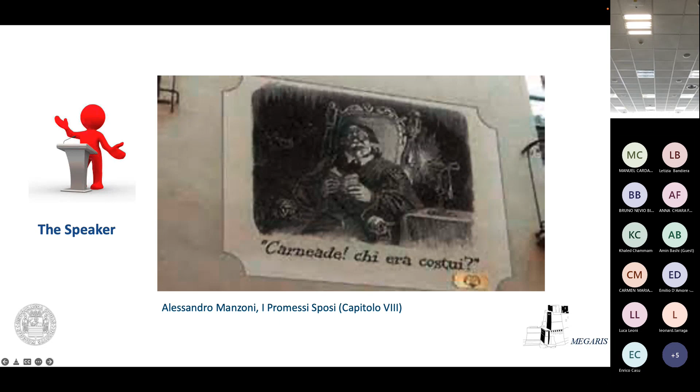I will be very fast. I'm a chemical engineer and have been involved in academic engagements over time. The reason was to notice that to be a professional engineer, you must be involved in your career both in the professional world and in the academic and scientific world. This isn't just a personal approach - the world is demanding this from young people, different from when I was a child.

This is essentially my department in Brussels, Belgium. I'm involved in the part of the physical chemistry department dealing with process safety, which is becoming a more and more important part of chemical engineering.

With the Mary Kay O'Connor Process Safety Center at Texas A&M, I had the pleasure to work with Sam Mannan. Sam Mannan passed away a couple of years ago, but was probably a pioneer - this is a very important department, maybe now the most important for process safety. We have 100 people working just on process safety, and I had the pleasure to interact with them on reactive hazard assessment.

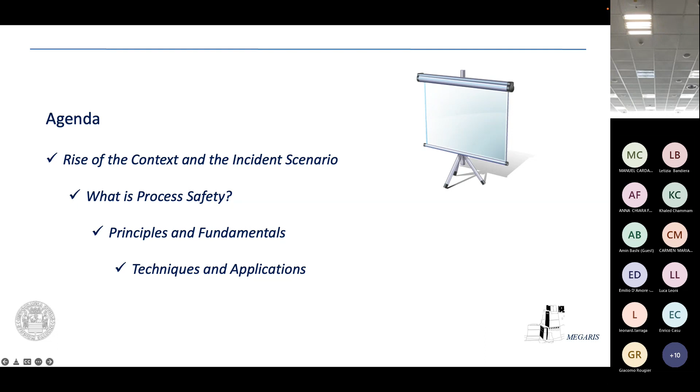Some principles and fundamentals - you are now in university, and we are very lucky, because you are following very important courses, and I know Professor Sesti is implementing a kind of mixed information between academic and also a look to the industry. So principles and fundamentals, some practical applications that we'll try to show and demonstrate to you, hopefully in the next minutes - rise of the context and incident scenario.

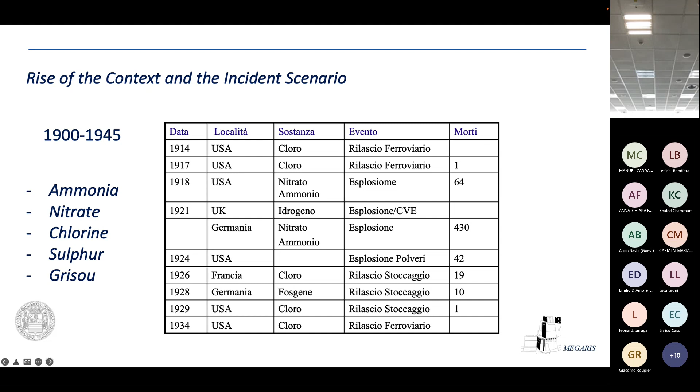5 incidents - I will try to be very fast. What is the context? We know that until the Second World War, industrial chemistry consisted essentially of inorganic chemistry: ammonia, nitrate, chlorine, sulfur, grisou. You remember maybe a relationship between these substances and incidents. There is no appreciable organic compound, just inorganic. We can see the relationship between geography, substances, event, and the final fatalities, lethality, and danger in general.

In the 1950s to 1970s, after the Second World War, the nuclear industry developed novel concepts. There was a scientific pushing effect regarding the necessity to find an inherently safe reactor - the reactor must be inherently safe. We will try to understand what we mean by this, but process reliability, risk assessment, and inherently safe reactor concepts come from the nuclear industry, essentially from its early stage in the 50s and 60s.

After that, due to the discovery of the potential of the carbon atom, oil and gas and petrochemical industry changed our life - when you were born, you already found the world, as Greta Thunberg would say, contaminated by plastic, but everything became much easier, thanks also to organic chemistry. So what was the change regarding our scope?

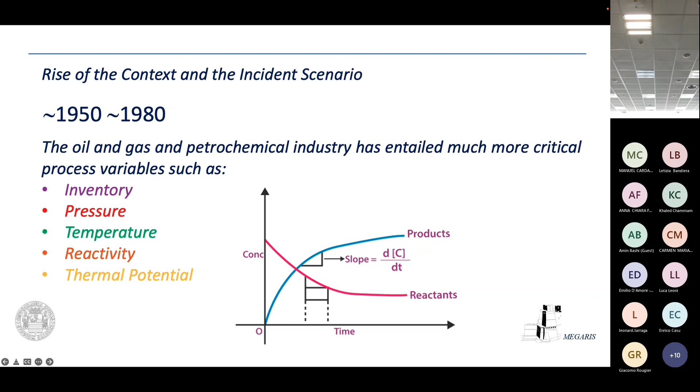Inventory - the amount of substances stored on site, pressure, temperature, reactivity, thermal potential - became huge, impressive, with no connection to the past of the industry. The nature of carbon chemistry, with its huge binding capacity, is like a Lego system - you know the Lego system, the Playmobil - multiplying production pathways and multifaceted chemical frameworks. Chemists discovered the potential of an atom with oxidation number 4, with the potential to bind with hydrogen and heteroatoms as well.

So toxicity became a relatively unknown challenge. There was no specific memory - in addition to Giovanni Verga's Rosso Malpelo, the sulfur mining story - in terms of scientific standards of what was essentially toxicity. Side reactions became a relatively novel scenario of the newborn process safety field - Dow Chemical had big problems. Side reactions is a very important concept: when we say chemical reaction in production, we believe the reaction we are looking at is the only one that happens - this is not true. We have a main reaction, the one we are interested in, but we also have side reactions. When chemistry became very complex, side reactions became very important and potentially hazardous and dangerous.

Okay, incident that made an era, an incident that milestone the technology. I will try to run, please.

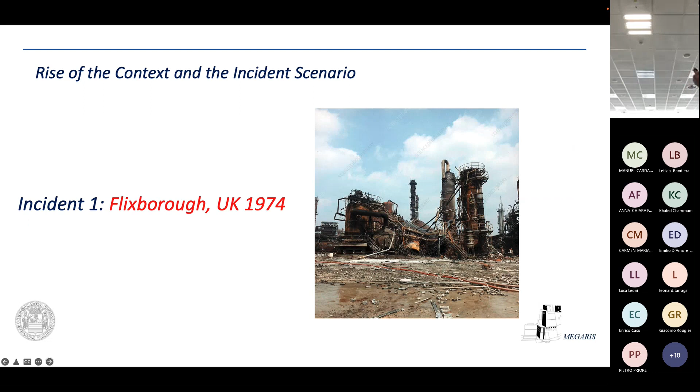Flixborough, UK, 1974. The process was related to the production of cyclohexanone, a ketone, from cyclohexane, to provide the raw material, the feed, for the production of caprolactam. Nylon was, at that time, a very new material. This was essentially the process. The process pressure was 10 atmosphere, and the process temperature ranged between 150 and 200 degrees Celsius.

Try to. No. It's not going on. Maybe.

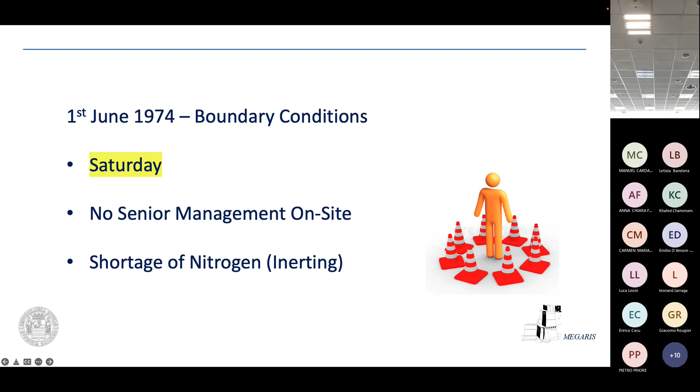Okay, we are in the United Kingdom, Flixborough, 1st June 1974. The boundary conditions for the incident were: it was Saturday, this is a very important detail. No senior management was present on site, just a junior engineer with 1-2 years of experience, and there was a shortage of nitrogen. Do you know Murphy's law? If everything hazardous can happen, it will happen with the worst conditions around. This was essentially the situation.

The process consisted of 6 reactors, tanks, where by gravity the liquid reactive stream was conveyed from the top to the lower level. You can see it going from the left hand side to the right hand side. This is essentially the plant before the incident.

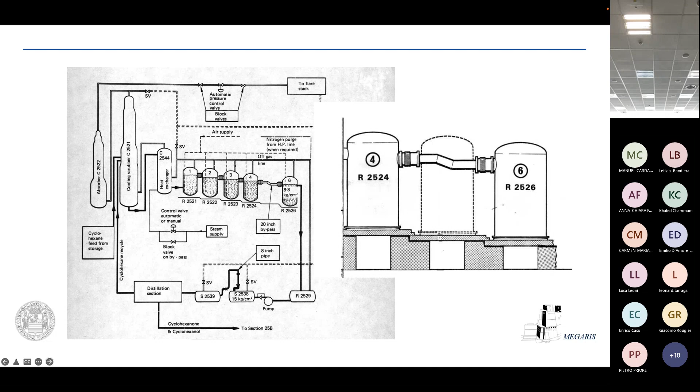What happened? A junior engineer, on the 1st of June, found that reactor number 5, between reactors 4 and 6, was affected by corrosion. There was a crack in the shell. So he decided to stop the plant, depressurize it, and remove the reactor.

In order to start again, he decided to connect reactor number 4 and reactor number 6 with a dog-leg pipe. It was essentially a 20-inch pipe, as you can see.

This is essentially what was built on site. You can see here a photograph of the connection between the two reactors. The 20-inch pipe was located on scaffolding, on a structure, because it was very easy, very smart to do.

This is a situation that you can find in my book. In my book, since I am always at university, we studied construction science too, so I tried to understand what happened from the point of view of stress analysis. I carried out a stress analysis calculation in order to understand, from the structural point of view, the outcome and why possibly the plant collapsed.

What happened in reality was: the junior engineer started the plant again, pressurizing it again, of course starting from relative pressure zero up to 10 bar, 15 bar. In reality, the two remaining reactors, number 4 and number 6, were pressurized, so there were two forces, FH, depending on the pressure, that tried to push the two reactors toward each other. There was essentially a pushing effect that affected the pipe.

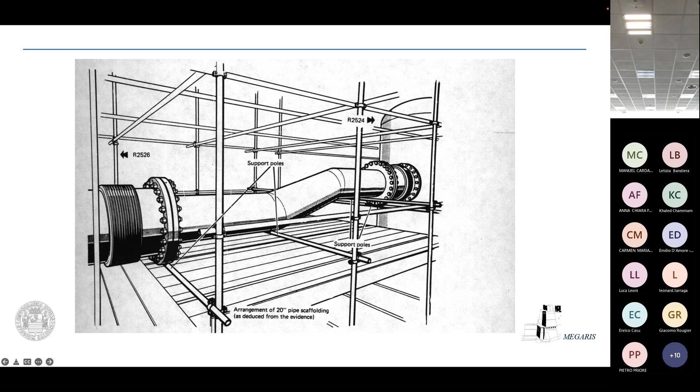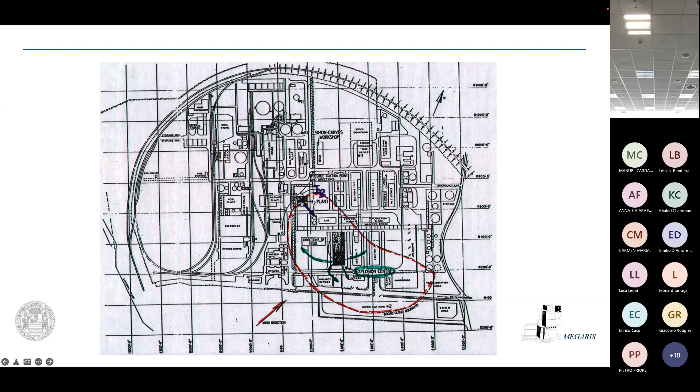We can see here what happened after the explosion. This is essentially what remained after the explosion. We can see the outline of the red line, which is where the dog leg was before.

Human lives cost: 72 individuals present inside the plant. 28 were killed, including all people working in the control room. 36 were injured. Outside the facility, over the fence, 53 were injured. These were people who had nothing to do with the plant - they were just driving or working outside. They were injured. Hundreds of other people sustained more mild injuries.

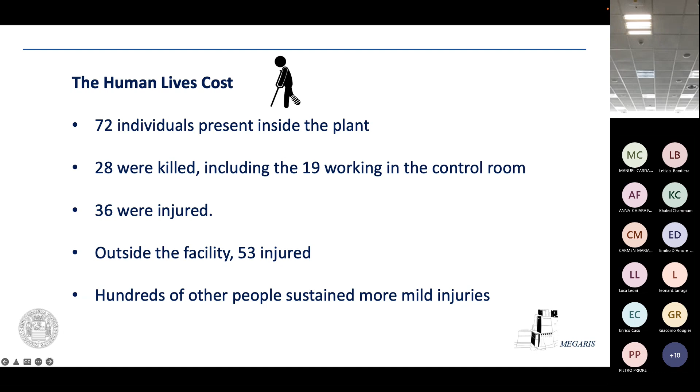The property damage shows what the potential danger is, why our work has become so important in the international project. All buildings lying within a radius of 600 meters around the explosion were destroyed, regardless of whether the building was inside or outside the plant.

800 housing units damaged, 800. People in Flixborough were convinced there was a war - they thought they were being bombed, because this was around 30 years from the end of the Second World War. They said they were bombing again, that people were coming with aircraft, because it was a warlike explosion.

73 in Amcotts, in the nearby village, were injured. 644 in Burton suffered serious consequences. A large piece of equipment was found 6 kilometers from the plant - you can imagine, 6 kilometers. Smaller debris was found 32 kilometers away. The fragments, the debris, are at 32 kilometers. You can imagine what it was like.

100 million, 1974 USD dollars. What is the lesson learned? Control rooms must be blast resistant. In the UK, outside processes were no longer allowed to be built in the process area. This became a national anticipated law in the UK in 1974.

Inventory means if you have a specific amount of substances, you must carry out risk assessment. This was completely novel, never carried out before. Spacing and layout, in terms of identifying appropriate distance between items in the plant, became a reason of concern in the design. ALARP is a very important, internationally recognized word for identifying risk.

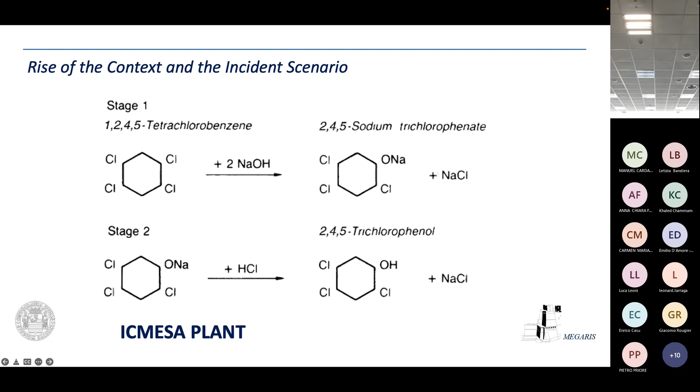Seveso, in Italy, 1976. I remember I was a child. What happened? There was essentially this Icmesa plant, close to Milan in Lombardy. This apparently very simple process consisted of the production of trichlorophenol for fertilizers, because we were in the 60s, so Italy had started its industrial development.

What happened is essentially that the rupture disk, which was there for protecting the plant from overpressure, collapsed and ruptured. This was due to the fact that the stirrer, the mixer, was turned off, preventing the reaction heat from being well distributed. There was an accumulation, because in a reactor, with an exothermic reaction, if you don't keep the stirrer on, you can have what is called a hotspot. A hotspot means an accumulation of heat and high temperature that possibly cannot be supported by the system. No cooling water was added either.

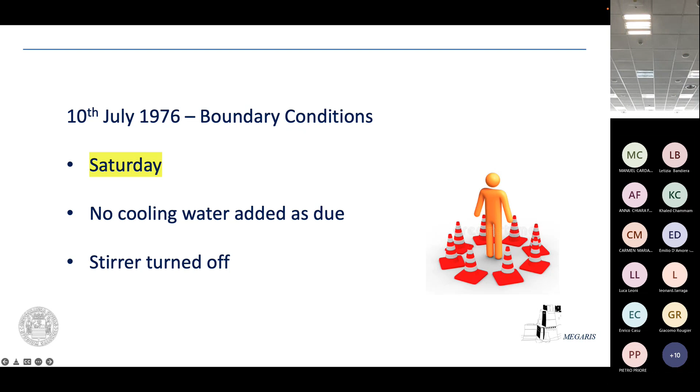This was the main factor. It was, once again, Saturday night fever - you know, on Saturdays you go out. I live in the UK, but my childhood was in Salerno. When I come to Salerno on a Saturday, I say, oh my God, okay, but I'm very old now.

I remember this as a child, we only had 2 TV channels, black and white. My mom called me to come see what happened to the children's faces. People said this was dioxin, but it was not true. What happened spread overseas, from New York, Los Angeles, everywhere in the world - people were shocked because they saw the children's skin appeared affected by dioxin. It was not dioxin, but people didn't know. This was sodium phenate, essentially the sodium hydroxide effect, but people didn't know. So the impression was huge.

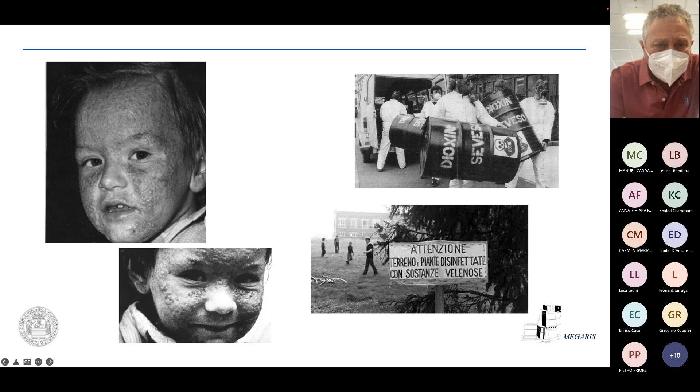As you can see, the consequences - maybe 3-4 kilograms of TCDD were emitted. 3-4 kilograms is huge, it's like a chemical war. Now we deal in ppb, parts per billion - but here it was kilograms, unbelievable. 42 children out of 200 living in zone A showed chloracne. It was just chloracne, but people said it was dioxin poisoning and that they were dying. No.

There was no immediate problem, but long term, probably many people died from cancer due to possible increased cancer rates - a long term effect - and some genetic anomalies. I will be very, very fast now.

Council Directive 82 - I remember this was enacted in Italy in 1988 with the DPR 175. This was essentially the birth certificate of risk assessment. Risk assessment existed in the UK only from '74. Then in '76 there was Seveso, leading to the 1982 directive, implemented in Italy in 1988, and then across Europe.

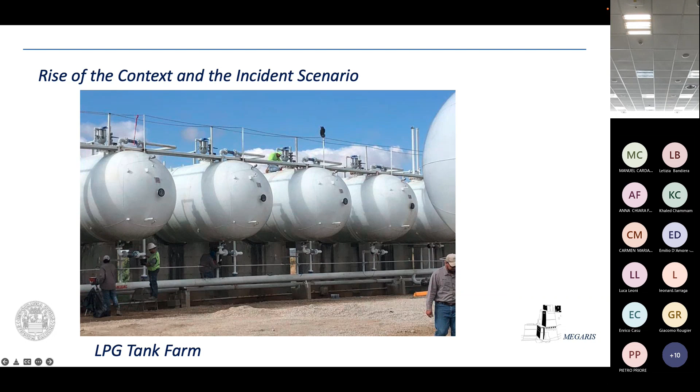The round tanks with propane - you can also have LPG, the GPL, in your garden. This is essentially what happens: the storage condition is around 20 degrees, maybe a bit more now, with the corresponding vapor pressure. So we keep the LPG liquid through pressurization.

What happens in reality if there's a leakage or release: the system suddenly realizes it's at a different pressure and must react by boiling off the liquid, because at atmospheric pressure the boiling point must reach minus 42 degrees - the normal boiling point. There's no way to receive heat except from the liquid itself, which provides the latent heat of vaporization. This is called a flash: the liquid goes from 20 degrees to minus 42 degrees, producing a fraction of liquid and a fraction of vapor, not gas, but vapor.

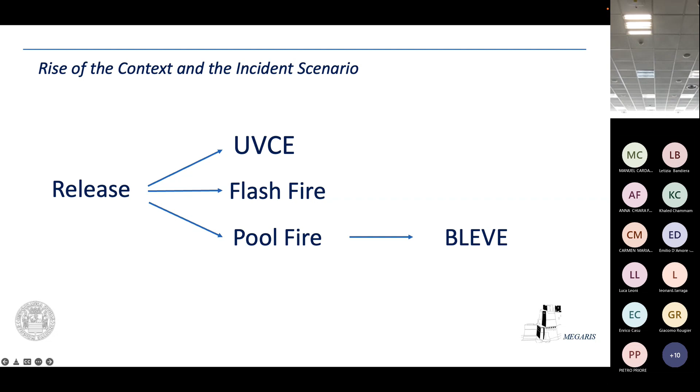What happened in reality in France? We are in the 60s. This was the Elf refinery, and you can see what happened. There was an operator essentially operating a drainage valve in order to remove water, because you normally have some water and hydrates in the storage of this kind of liquid.

This stupid and poor operator opened the drainage valve at the bottom of the sphere, of the tank, and he realized there was essentially a cooling effect. The temperature dropped down to around -40. He was essentially completely frozen, you can imagine, and he tried to close the valve again, but it was impossible because the temperature caused embrittlement, and he was no longer able to close the valve.

So you can see what happened: the flammable cloud, the LPG, left the tank, moved - it was overnight or early morning. The flammable cloud reached the highway. There was a poor driver who was responsible for the ignition. He ignited the cloud. So there was essentially a flame. The flame traveled to the tank, and there was essentially a BLEVE.

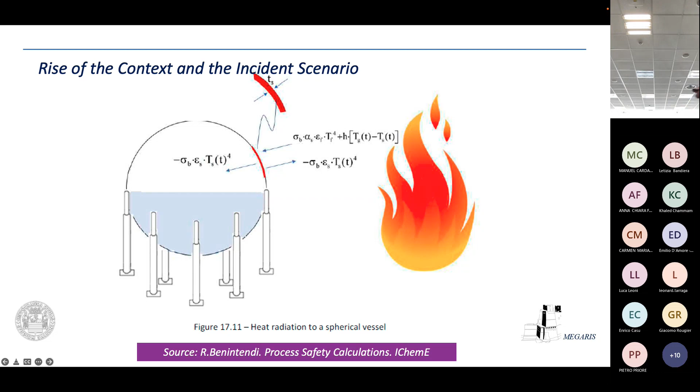So boiling liquid expansion vapor explosion - you can see here what a fireball is, you can imagine. Sometimes firefighters die when they are caught, because the burning duration is very long, and when firefighters come inside, due to the unbelievable radiation, many of them normally die, unfortunately.

That's the reason why, now recently, I know that Professor Sesti has provided you with the basic elements of the P&ID. You can see here some mysterious code, CSO-CSC. It means car seal open, car seal closed. The worker had not been able to operate a hazardous valve.

That's the reason why, when we carry out a HAZOP, we normally say during the brainstorming: can this valve be left free to be operated by anyone? And if not, car seal open. This is a pressure relief valve - its intervention happens when you have an overpressure that can rupture the system. So there is a set pressure, and a pressure relief that can protect the system from rupture. And now, if there is a valve that can be inadvertently operated, you find on the P&ID CSO.

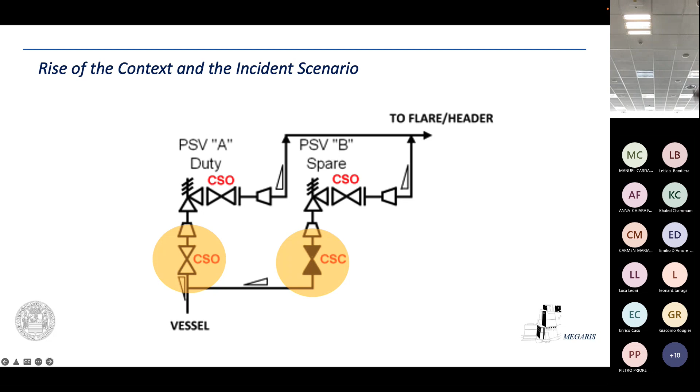Piper Alpha was terrible, I will be very fast. Essentially, just a pressure valve was replaced with a flange. The flange was sent off, and it happened what you see there. 165 out of 226 operators died. Many of them tried to save themselves by diving into the sea, but they were essentially burning. You can imagine what it was like on a platform - a platform is a very congested and small place. 1.5 billion US dollars, this is probably an injury, a wound in the...

...West, because there was essentially a Union Carbide plant. MIC, methyl isocyanate, was produced and used for additional reactions. What you can see here is a scrubber - the scrubber was a protection system for any release of MIC. MIC is very poisonous, very hazardous. What happened was the plant was stopped. There were 2 isolation valves in addition to prevent any escape of MIC.

There were 2 additional barriers. The plant was stopped, but both the barriers and the valves didn't work. They leaked. The MIC arrived to the scrubber. There was no water. It was a very simple system, essentially just relying on feeding liquid in order to capture the MIC and prevent it from escaping from the stack, but there was no water overnight.

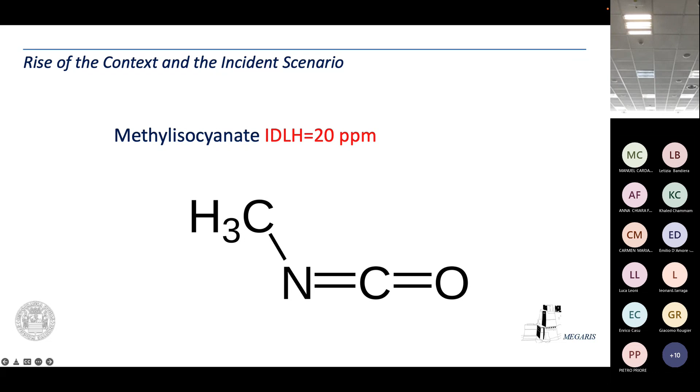It's very low. There was essentially a huge amount of MIC that left. What happened is unbelievable.

The root and immediate cause was isolation valve tightness failed, additional barriers broke down, water flowed into the MIC tank, the scrubber didn't work, the flare didn't work. Nothing worked. You can see what happened.

It's unbelievable. I don't know how it's possible, but immediately around 2,000, more than 2,000 people were killed. They didn't wake up in the morning anymore. They died while sleeping. We are in India here.

We're in India. 20,000 short and long-term killed. So several investigations showed that probably many people were affected by long-term risk, and they died after 6 months, because MIC has a different toxic and hazard profile.

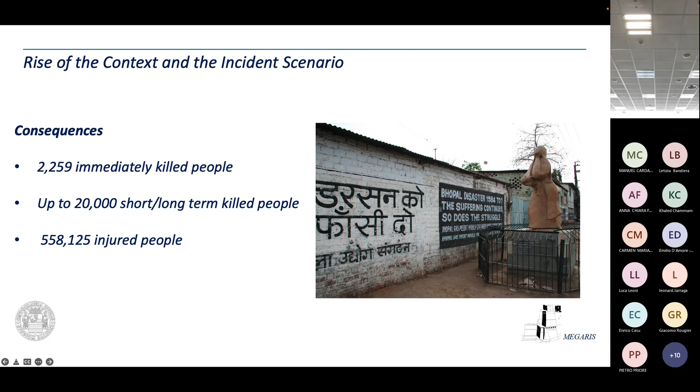Affected people numbered 500,000, just for a very simple system with the water that should have been there, you can imagine what happened. Okay, this is essentially the scenario of Bhopal.

Imperial Sugar, I don't know the time, but I would like to, if we can, because we have a video - because you know, in Italy we say 'dove c'è barilla c'è casa.' Sugar, flour, coconut dust - but you remember we worked together 30 years ago with Giorgio Donzi, and we were very young, many kilograms ago, I remember. And you remember, flour and sugar, they can explode.

There is a video, I don't know if it's the case to show it and then pass to the second module. If we can, I'll try to accelerate the video, but I want to show you what happens. Just find the folder where we have located the files - no, it's in the folder, you have the video. Okay, I can show you, this is essentially an incident, Imperial Sugar Company. When you say sugar can explode, people say you are crazy, sugar is Ferrero, is Nestlé, is Baci Perugina, but in reality - I will try to accelerate if I can. What happened? We can stop at a certain moment if we are going.

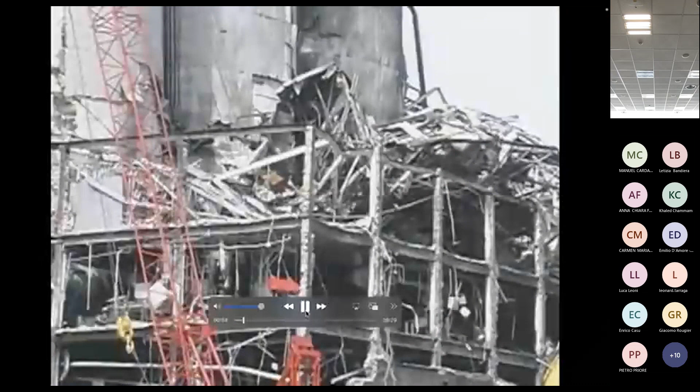This is Imperial Sugar Company. At 7:15 p.m. on February 7th, 2008, a series of violent sugar dust explosions devastated the Imperial Sugar Refinery in Port Wentworth, Georgia, just outside Savannah. Explosions raced through the buildings, fueled by accumulations of combustible sugar dust and sugar that had spilled from equipment. Thick concrete floors heaved up, and brick walls were blown into stairwells and work areas, blocking many exit routes. Fires spread rapidly.

8 workers died at the scene. 6 more died later at a regional burn center. Dozens of others were injured. The plant's massive sugar packing buildings were a total loss. The accident at Imperial Sugar was the deadliest industrial dust explosion in the United States in decades. It highlights the extremely serious nature of combustible dust hazards. There were significant accumulations of sugar dust and spilled granulated sugar on surfaces throughout this facility. Conditions were set for a catastrophic accident.

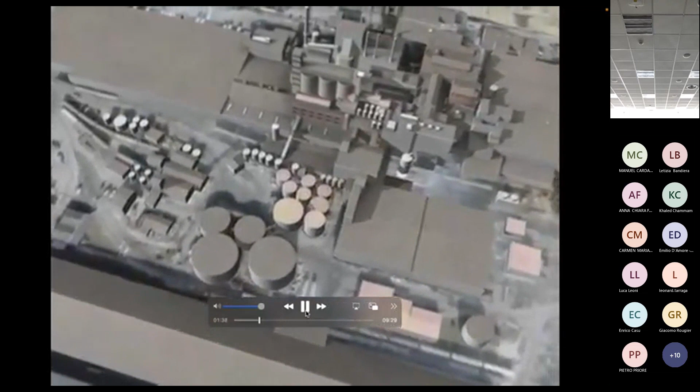Imperial Sugar's sprawling Port Wentworth complex began operations in 1917 and grew to become one of the largest sugar refining and packaging facilities in the U.S. Granulated sugar from the refinery was stored in 3 100-foot-tall silos and then conveyed into packing buildings where it was packaged for distribution. Granulated sugar was also converted into specialty products, such as brown sugar and powdered sugar. Sugar was transported by a complex system of bucket elevators, screw conveyors, and conveyor belts.

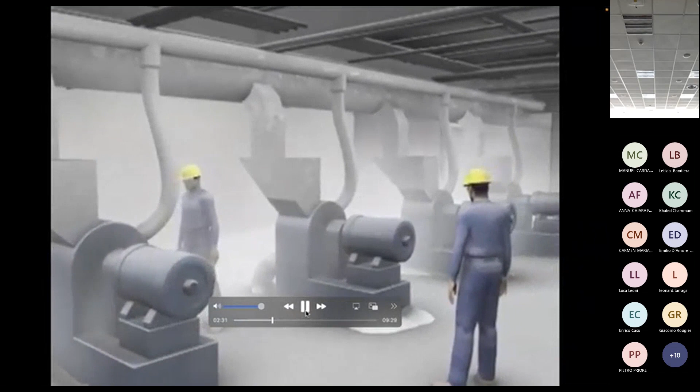During this process, sugar spilled onto floors throughout the work area. In places, the spilled sugar was many inches deep. This sugar also contained fine particles, which became airborne. In addition, hammer mills were used to crush the granulated sugar into powdered sugar, creating even more dust. The machines were connected to a dust collection system, but it was undersized and in disrepair, and it was not connected to the bucket elevators and conveyors.

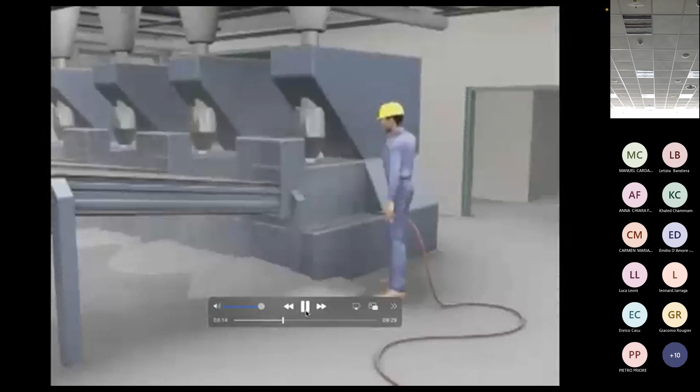Significant amounts of sugar dust escaped into the work areas. Workers routinely used compressed air to clean packaging machines, further dispersing sugar dust throughout the buildings. Over time, large amounts of dust accumulated on elevated, hard-to-clean surfaces, such as ducts, beams, and light fixtures. These surfaces were not cleaned often enough to always keep the dust below hazardous levels.

In the tunnel beneath the sugar silos, granulated sugar flowed through chutes onto a long steel conveyor belt. From time to time, clumps of sugar would become stuck in one of the chutes, blocking the flow of sugar on the belt, spilling sugar onto the floor and releasing dust into the tunnel. But the tunnel was large and ventilated, so this airborne dust did not build up to explosive concentrations.

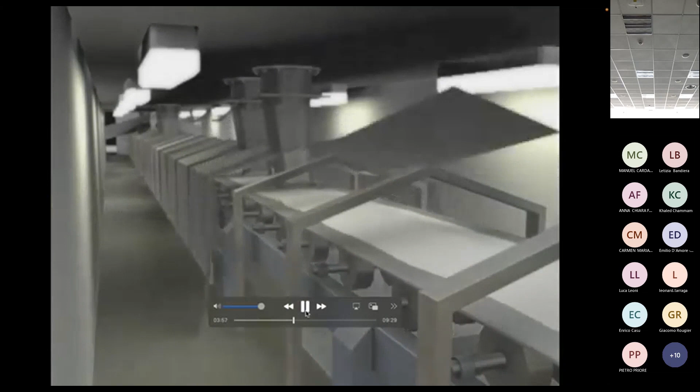However, in 2007, the company enclosed the conveyor belt with stainless steel panels to protect the sugar from possible contamination. The enclosure was not equipped with a dust collection system. As a consequence, sugar dust would now be trapped inside this enclosure.

On February 7, 2008, clumps of sugar were found blocking one of the discharge chutes. Sugar from the adjacent silo likely spilled off the moving belt. Dust likely accumulated to an explosive concentration inside the enclosure. At about 7:15 p.m., the sugar dust contacted a nearby ignition source, likely an overheated bearing, and exploded.

This primary explosion blew apart the enclosure and vented into the packing building. Accumulated sugar was lofted and ignited by the advancing fireballs. The dust clouds fueled a chain reaction of secondary explosions, which swept through the building. Concrete floors buckled, releasing tons of granulated and powdered sugar into the flames.

Emergency evacuation drills had not been conducted, and the explosions had cut the power to much of the interior lighting. In the maze of darkened and damaged stairwells and passageways, workers desperately tried to flee the growing inferno.

So you see, all organic dust can result in this kind of explosion for lack of housekeeping, maintenance, and design as well. So, United States, the second one, thank you.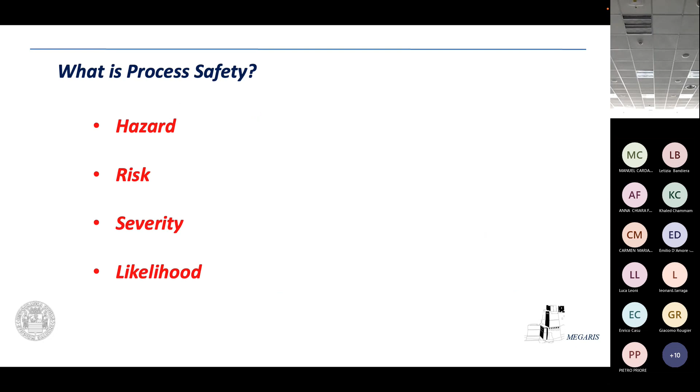The key definitions are hazard, risk, severity, and likelihood. Hazard is a potential for harm. In Italian, it's pericolo. There is a difference between pericolo, or hazard, and risk. Pericolo is an inherent property of the substance or of the context - there is nothing you can do to eliminate an inherent property. If you have a property, you have the property. So this is hazard: an intrinsic property, a potential for harm of a substance, process, or context, which does not depend on modalities and so on.

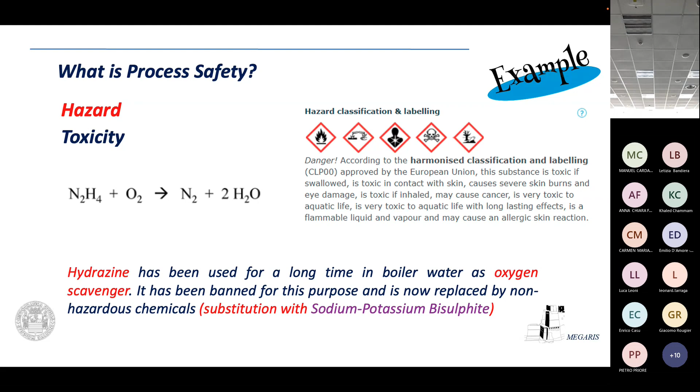It remains in place. For example, when I was young, hydrazine was used as an oxygen scavenger, to remove oxygen from boiler water. As you know, oxygen is potentially responsible for corrosion in boiler water. We used hydrazine, that is N2H4. The reaction with oxygen produced just molecular nitrogen and water. So it was perfect, but in reality it is carcinogenic. So it was essentially a hazard. What happened is what you can see.

This is CLP - the classification, labeling, and packaging European regulation. It's a big book that can provide you with all information about substances. You have a CAS number, you have the substance, and you essentially have the risk, toxicity, noxiousness, and so on. So you can see how hydrazine is hazardous.

The laminar burning velocity of methane is 40 centimeters per second. The laminar burning velocity of hydrogen is around 380. So it means that when hydrogen will be implemented in the ecology transition - a fantastic name for the new ministry, I don't understand what it means, transition ecology, but it's fantastic - consider that you are going from a low reactivity gas, fuel gas, LNG, to high reactivity. It means that the design, handling, and management of hydrogen is potentially inherently much more hazardous than methane.

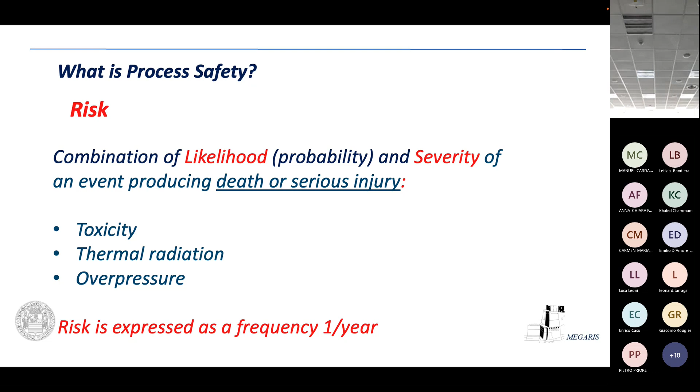So this is essentially the three main bands of risk: toxicity, thermal radiation, overpressure. Risk is normally expressed as a frequency, so it's a number of incidents over the time.

Okay, severity - what does it mean, severity? It means quantification of consequences.

Here we have the American Conference of Governmental Industrial Hygienists that provides you with some specifics. When the Seveso incident happened, or Flixborough, there was no memory about this. I remember, I was a child, I remember I saw on TV that some Americans came from overseas because they were much more experienced about toxicity. In Italy, we didn't know anything about toxicity, about dioxins. So there was a big confusion.

Now we have this - TWA, this is probably the most important international standard and association. It's highly reputable. In Italy, this is recognized if you have problems, or if you apply rules about process safety - this is one of the main references. TWA means time-weighted average, essentially a concentration you can tolerate over an 8 hour working day. STEL is an acronym meaning short-term exposure limit, around 15 minutes.

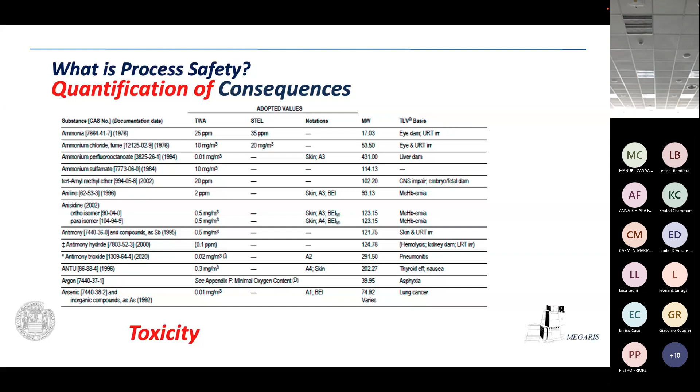You have a molecular weight, and you can have some information - ammonia, ammonium chloride, and so on. This is essentially a very important slide because we can collect information about some important codes regarding toxicity.

For example, H2S - you know H2S is just the smell of rotten egg, when something is going wrong with food you normally can perceive why. Our nose is designed to capture when proteins break down. That's the reason why our odor sensitivity is much more related - we can probably perceive something going wrong with food, fish, and any other food, because below 1 ppm of H2S or ammonia, nitrogen and sulfur are probably the leads of some specific mercaptans, amine, and so on. That's the reason why our sensitivity is so strong.

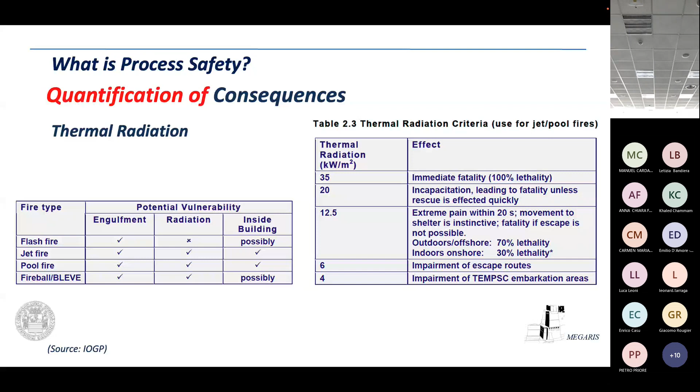So after some seconds, as long as time goes on, you can have an increasing pain on your skin. This is very important because this is released by international standards. It isn't just academic studies, because science, technology, technique, and application all connect.

The science is on top, but essentially this is IOGP, an international standard collecting together information from oil, gas, and chemical companies. You can see here, we use this for the emergency plan.

You can see overpressure. Overpressure presents two main problems in process safety: buildings and people that are affected by overpressure. The lung, the chest is broken and you can die, depending on the overpressure.

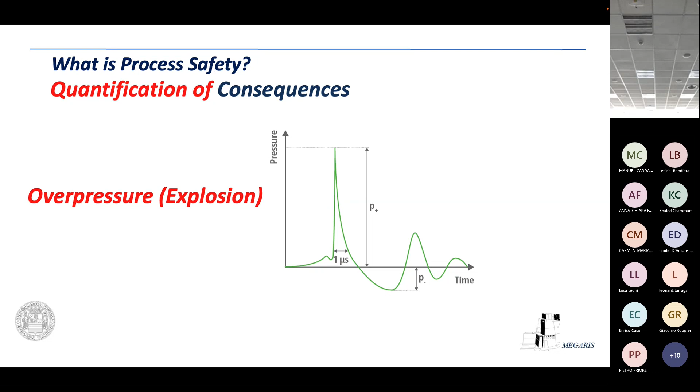The investigation carried out for Flixborough demonstrated that the roof of the control room collapsed. All people died because it was too near.

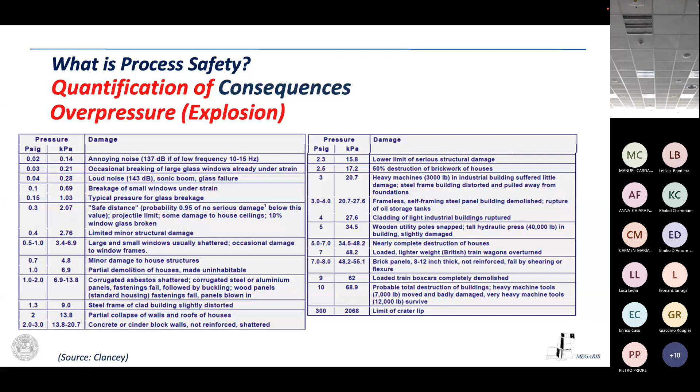We can see here that we have a kind of list of damage depending on the overpressure. This is one of the most important classifications relating damage against overpressure. Very important. So this is the third band.

Quantification of likelihood, and quantification of consequences - these consequences are not affected by probability. This task is completed by applying engineering disciplines: thermodynamics, physical chemistry, fluid dynamics, structural engineering, and this is consequence assessment.

But we know that in reality we have probability. The probability is important because, I hope not to be a prophet, but if this roof drops down, this ceiling, probably we can die. So the consequence will be terrible, but the probability is very low. The risk is very low.

Now we will discuss likelihood, probability. Normally we discuss loss of containment. Risk assessment, unfortunately, is just loss of containment. We have a loss of containment, so we have a release of substance, toxic, flammable, and so on. So we have essentially momentum, buoyancy, and passive dispersion.

We have a kind of sequence of fluid dynamic regimes regarding the outcome of the release of gas or vapor. Of course, momentum means you have a very high Reynolds number, so the release velocity, normally around 200, 300 meters per second, is the governing parameter for that.

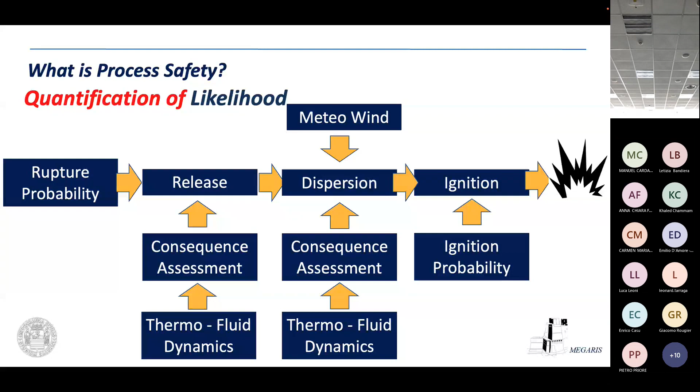So we have essentially rupture probability, release, then dispersion, and we can have ignition. The release is represented by consequence assessment techniques and thermofluidynamics, then dispersion again, and ignition probability.

This is the sequence. Here we can see some release frequencies of plant or equipment: pipe, flange, manual valve - these are standard, not just academic. They come from statistical study, used in process safety to size exactly, to have a kind of dimension of the release frequency when we have a plant.

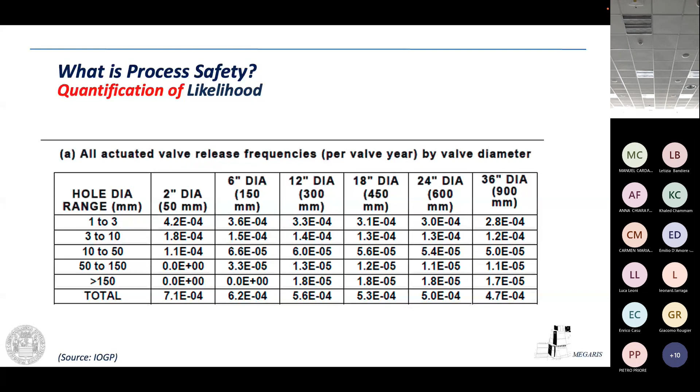Reactor, pipe, filter, distillation column, everything you can imagine in the chemical industry. Actuated valve, motorized valve. And here you have essentially pressure vessel frequency - you collect information regarding the frequency because risk is a combination of frequency and consequence. Centrifugal pump and so on.

Unfortunately, we have to consider that going to the wind is important. So you can imagine we multiply all the frequencies, everything, by the probability to have a specific wind speed in a specific direction. We have to mathematically combine together all this information. It's huge, you cannot imagine. We have tens of thousands of pieces of information that we have to combine together in a process safety study in order to have something robust theoretically.

In addition to the wind, we have the weather stability, because from A to G we have a completely different behavior of the stream, of the toxic cloud, of a flammable cloud. Normally we use D and F. Why? Because F is stable - when you see a very nice day and you look at an industry with a stack, you can see that the stack emission is very stable.

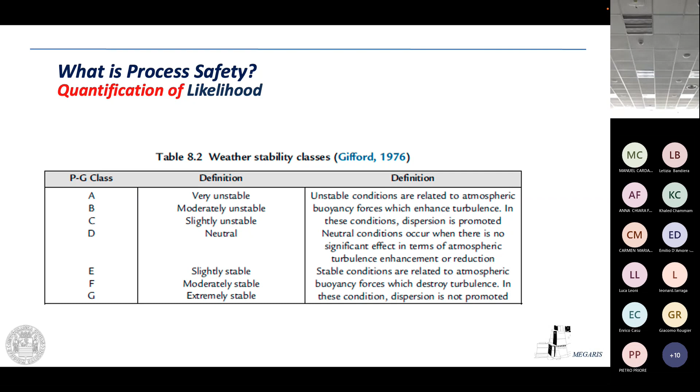Here you have essentially the quantification of ignition probability, because after the release, after the dispersion - in Feyzin, for example, the flammable cloud traveled and the ignition happened at the hydrogen plant. So in addition to everything we said before, we have to add ignition probability, which is not 1, it can be 0.2 or 0.3. We normally use calculations like this - I won't enter the details because there's no need.

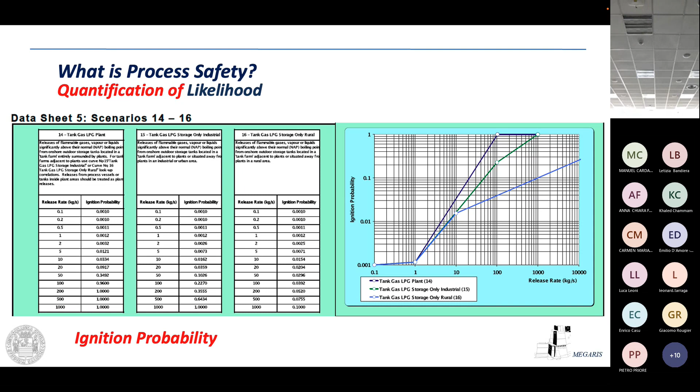Risk is normally, remember, of two kinds: catastrophic which is immediate risk, and occupational. Occupational is, for example, when you have specific chemicals that don't cause immediate harm - like asbestos, amianto - there is probably a time for the illness to become evident, even 20 years. This is occupational, meaning you are breathing something that can cause headache, stomachache, or problems with your well-being. It is occupational during normal operation, and this is important for process safety.

But you have catastrophic, which is easily understandable. We can see what risk means. For example, what is the most hazardous or risky situation between acetylene and methane? I would say, looking at the safety data sheet and properties, the first one, because acetylene is much more inherently hazardous.

But if I have a welded pipe, probably the frequency of having a release of acetylene is very low. If I have methane, which is less hazardous, but with a flanged connection, it's much more probable that I have a release - so it is much more risky, the second one. This is to help you understand the difference between risk and hazard.

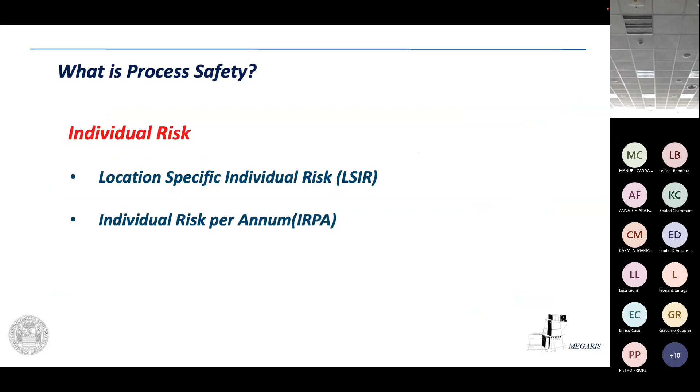So, what is location-specific individual risk? It's the probability of death of a person that will remain there in an X, Y, Z location for 24 hours a day, 365 days per year. Location-specific. So it is not related to the probability of the person being there, the worker, the engineer, but it is for all time. This is location-specific individual risk.

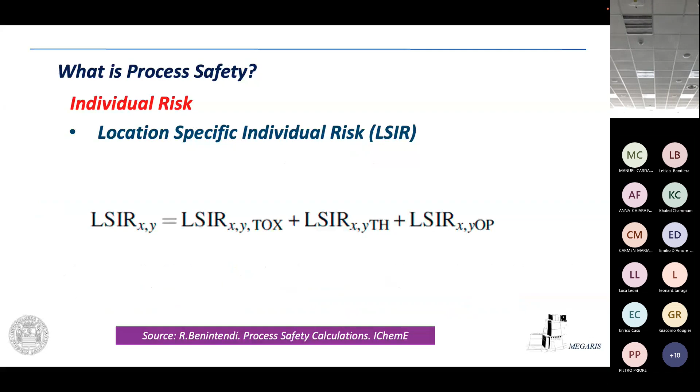In reality, this should be, okay, we can have an alkylation plant, an oxidation plant, a sulfur recovery unit, so we have X, Y, and we can add together to obtain the overall LSIR. We can combine together, we can sum all the risks, depending on the combination. Normally, as I said before, risk means toxicity, thermal radiation, and overpressure. In the end, we can sum up all the LSIR to obtain the overall location-specific individual risk.

In the end, an escamotage, in order to reduce the risk, sometimes we don't use this, but in reality, according to the UK, which is worldwide applied, we use the IRPA. IRPA means that, okay, we have a location-specific risk for 12 months, but if people are there only 6 months, 1 month, 15 days, is the risk the same? No, it is IRPA: the risk of death or serious injury to a person, considering the fraction of the year spent there. I don't agree with this, but it is a rule.

Sometimes people increase the number of shifts, turning. So you have 3 shifts, 8 hours each, you multiply the LSIR by 0.33. But if you go to 4 shifts, you multiply by 0.25, so you can reduce it. In reality, the risk is always the same, but you can say, okay, I have reduced the individual risk.

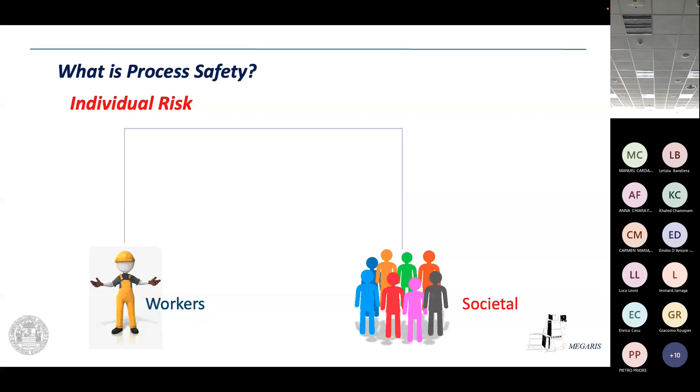So you can see here, this is for you. You will remember about myself, not because I am special, but because this is very important, and I'm sure 30% of you will be affected. All of you will be affected in the future about this. 30% of you, sooner or later, will work as a process safety engineer, because chemical engineers, I'm very proud of it, we are probably the best engineering discipline for covering process safety.

You remember the ALARP model. The ALARP model was created in 1974 in the UK by the HSC. ALARP means as low as reasonably practicable, 1974, exactly the same year when Flixborough happened.

What can you say about this? It's very important, it's the heart of the system. We have the risk, but is the risk acceptable? Yes or no? It depends on the local sanitary controller. What does it mean to have a risk, and how can it be defendable to consider my risk acceptable? There must be some rule. The rule is the one provided by the UK Health and Safety Executive.

Why? Because in 1974 they carried out a very long statistical investigation, and they said we can be statistically defendable if we say there is a broadly acceptable region. It means that if the risk is below once in 1 million years, 10 to minus 6, I can relax, I can go to Positano because there's nothing to do, my job is finished. If I am higher than 1 in 1,000 years, no, the design must be revised, it is not acceptable. There is an intermediate band, that is the ALARP band.

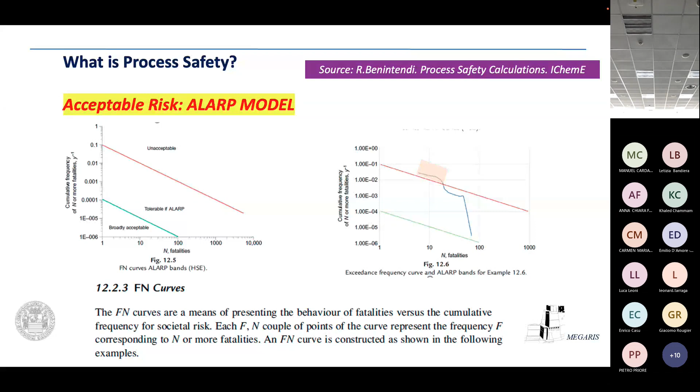What does it mean? This is an addition, but I will try - for F-N curves it's a little bit tricky, but it's a way to cumulate the incidents to see where you are. Again there's broadly acceptable, unacceptable, and ALARP. What does ALARP mean? It is the provision and maintenance of plant and systems of work that are safe and without risk so far as reasonably practicable. It means that you are requested, if your risk falls within the ALARP band, to demonstrate it through a sensitivity analysis.

If you try to reduce the risk, what is the cost? Because unfortunately the problem of people dying is an economical problem. It's an ethical problem, but when you are an engineer, you are dealing with dollars, unfortunately, so it is economical. If you demonstrate that reducing the risk further has a disproportionate cost, okay, it is acceptable. Otherwise you have to implement an addition. This is a lot.

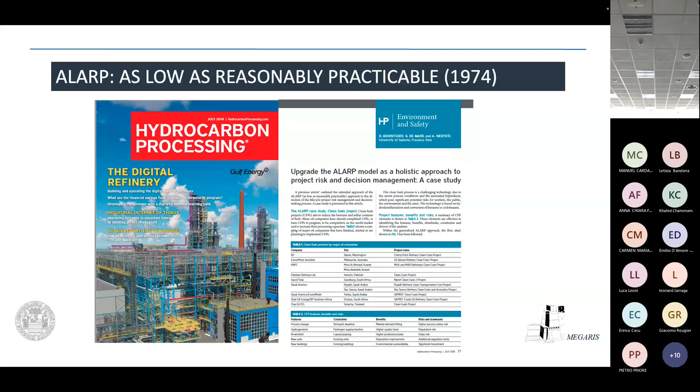Okay, so after this, process engineer - what is a process engineer? I think it's very important, in my experience, to differentiate process engineer from process safety engineer. This is my attempt, you can accept it or not, it's my definition. Process engineering's outcome strictly complies with the design specifications, implemented through the simulator according to the license requirement. Any process deviation is predicted and properly managed by the control system - unit operations, distillation, absorption, and so on.

It's unlikely that you can have a big departure of the plant's behavior with respect to specification. This is process, because you are designing. Unfortunately, in process safety you don't know exactly what can happen. You can have a prediction, but the allied uncertainty is absolutely huge. So the outcome of process safety presents much larger qualitative and quantitative uncertainty. The adoption of software simulators and predictive models is not as effective as for process engineering, because if your plant is okay, everything is going according to the design - if not, you can never know.

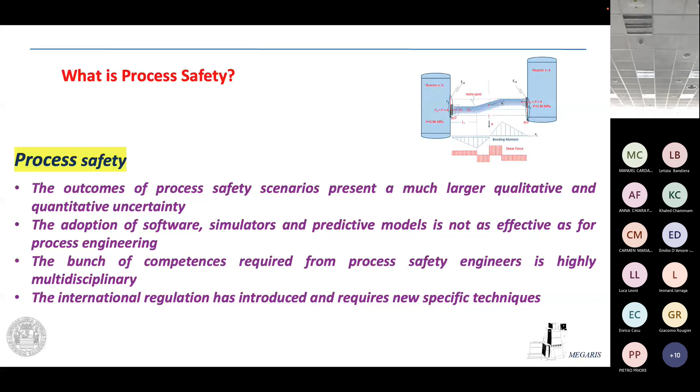It's unlikely that someone would ask what is the stress of a flange. Yes, you can increase your background as you work, but when dealing with pressure vessels, you must understand something about structural engineering even when you're a process safety engineer, much more. The international regulations have introduced requirements for new specific techniques. That's huge, and that's the reason there are specific seminars in the UK, master's programs, and faculty about this - because it's completely about principles and fundamentals.

This is the book. This is my master, Professor Gianni Astarita, who was a chemical engineer in Italy. He passed away in 1997. I have dedicated my first edition of the book to him. I miss him a lot. I'm very proud to have had the chance to be his student in the 80s.

This is important, very important. I'm very happy that I have the chance to share this with Professor Sesti, because much more than in the past, the link between industry and university for process safety - now they are just one. When I studied, academic science was probably much ahead compared to industry, so there was a gap. Now it is not forgiven - sometimes industry is much more updated than the university. So they have to work together.

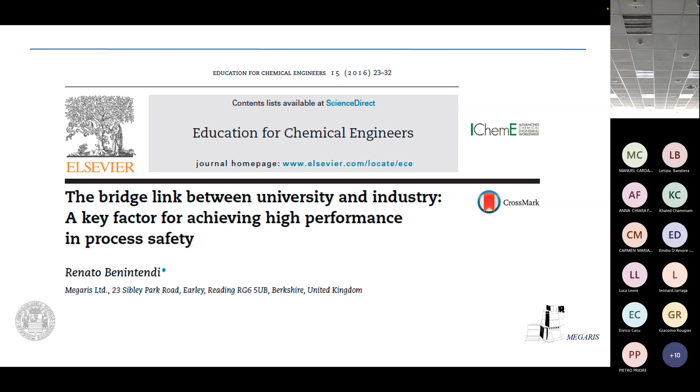You can see the standard is the standard regulation. My book - that's the reason why I wrote it - includes some fundamentals. I don't know a book that specifically includes fundamentals related to process safety. That's the reason why, when I was requested to write a book, I called it Process Safety Calculations - chemistry, but for process safety. You can see here how important specific information about chemistry is regarding process safety.

You have thermodynamics and thermokinetics for process safety as the second chapter, then reaction engineering for process safety as the third. You can find other books on this, but this one is specifically for process safety. There are specific reaction routes that are relevant for process safety, and if you know them in advance, it's much better. Then fluid dynamics for process safety.

This is partially covered by chemical engineering. We studied the Navier-Stokes equation, we studied hydraulics, because we are very old. I'm very proud we were forced to study hydraulics, because in Naples, where I graduated, hydraulics was a mandatory subject, so we also carried out studies about it. But fluid dynamics is much wider, so this must be covered by the process safety engineer much more than what he received during his graduation period. This is new.

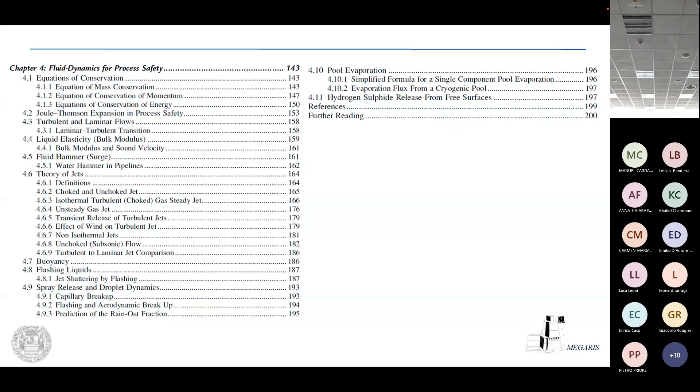I found out when I started working in the 80s that I had to keep my structural engineering knowledge very fresh, because we are engineers. What differentiates us from Maria? Maria is an industrial chemist, as is my wife. Of course, I was a teacher, so I had a dominant position - then we married, and now she's the boss, of course. But what essentially differentiates a chemical engineer from an industrial chemist is that we know structures, we know machines, they know process. They are very similar, but this is important.

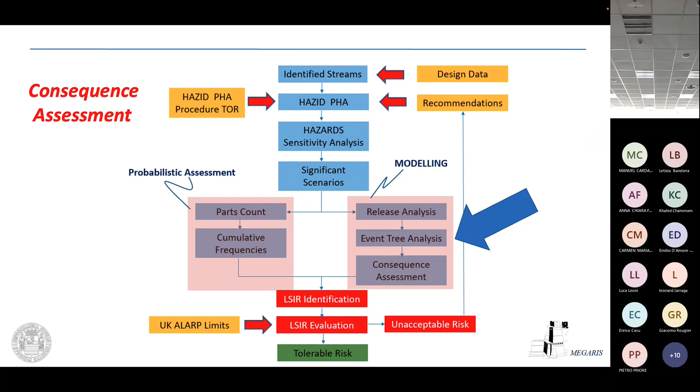It must be covered - modeling. We have seen that we have a release, we have a dispersion, and we can have an impact. This is the three main sequence. When you have a release, we have source models - these are the models that help us discover what happens if we have a release of a liquid or a gas. So source models are validated models.

So it means that below 5 bars, CO2 cannot exist as a liquid. So if you go below the triple point of CO2, that now is the new challenge.

Because we have global warming, because Greta says I will never fly again if I don't have an aircraft with hydrogen. Okay, Greta, okay, good. No, because this is the power of social media, no? So you don't need a degree, you speak, you are very fluent in English, you are a child, and every person governing a nation says okay, Greta. But in terms of, I have a degree in engineering. No, it's Greta. Greta knows everything.

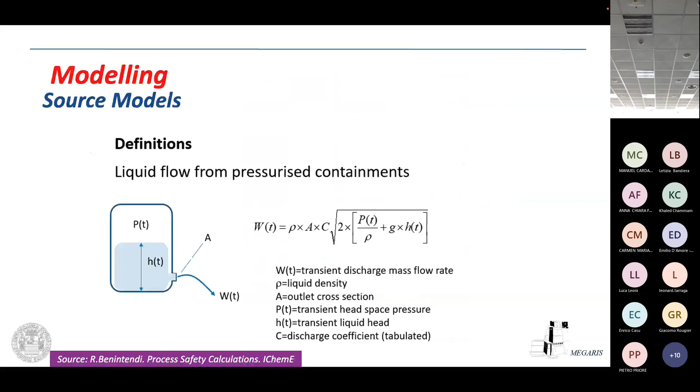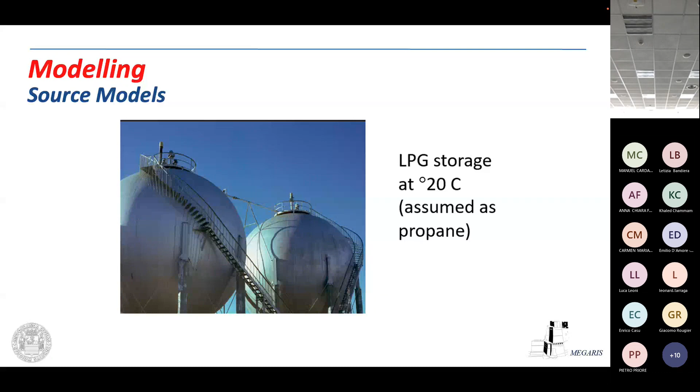The liquid fraction must be dealt with according to the pool vaporization model. We have some pool vaporization models that we use in the study. So what is the time and what is the outcome of vaporization with the flammable cloud? But only the flash vapor fraction is immediately available to be dispersed. So we have two models. We calculate separately, we include in the risk assessment, we add the probability, we add the wind, and so on, and we have the final risk.

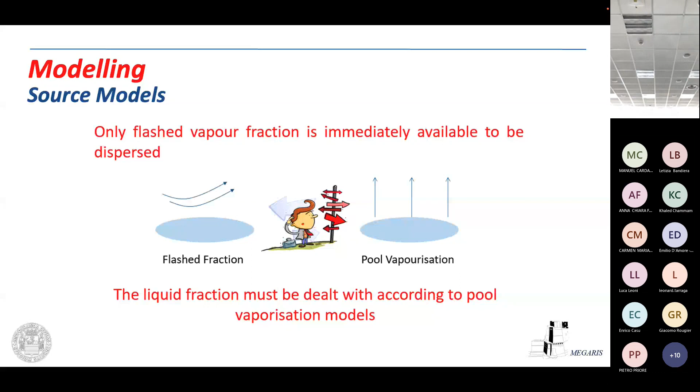This is what happened. Then we can see on the papers, I don't trust it. I have not understood. I have heard that hydrogen comes from ammonia. So the Fauser reactor, we started to produce ammonia. Now we produce ammonia and we recover hydrogen from ammonia. Fantastic. But maybe I'm not updated, maybe. Hydrogen is hydrogen. There are some international symposiums on hydrogen. Sorry, but where can I buy hydrogen? From Amazon? Can I buy hydrogen? So I don't understand, but this is my limit, okay.

LNG is already at atmospheric pressure, and a strong driving force exists, forcing it to boil without flashing. Because there is no gap between normal boiling and atmospheric boiling, it will be released and will vaporize because it is at atmospheric pressure, it's not pressurized. You can see how important it is to understand the physical chemistry when you are a process safety engineer. This is the dispersion scenario. Once again, section, turbulent jet, transitional laminar jet, momentum, and so on.

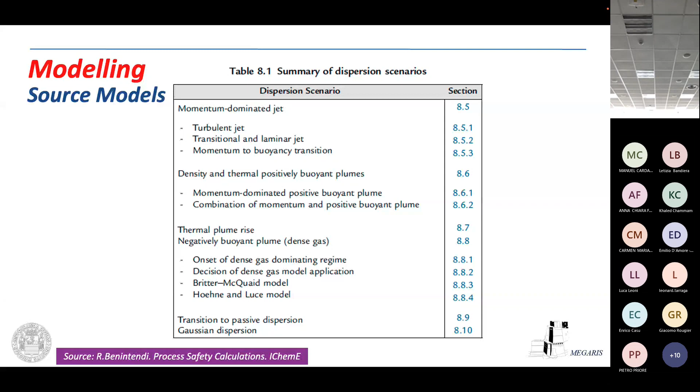You can see a lot, including the dense gas dominating regime. Sometimes you can have heavy gases that are heavier than methane, but sometimes ammonia, due to the temperature, behaves like a heavy gas because it has a molecular weight of 17. But if you have 0 degrees, the bulk density will be higher than air.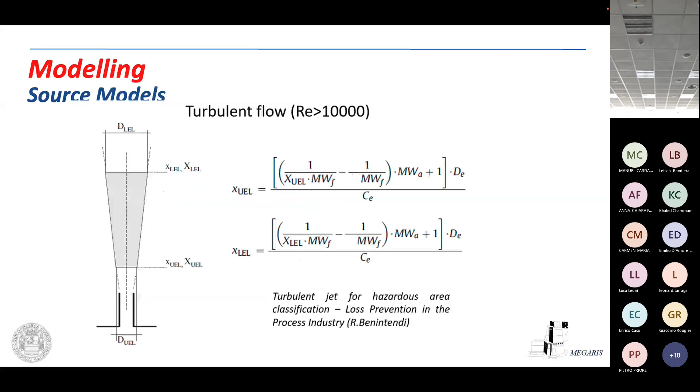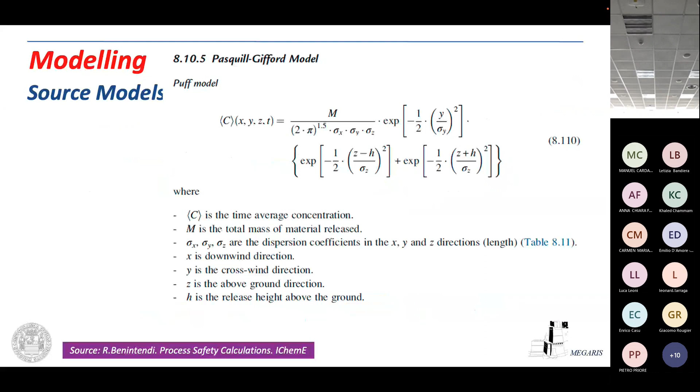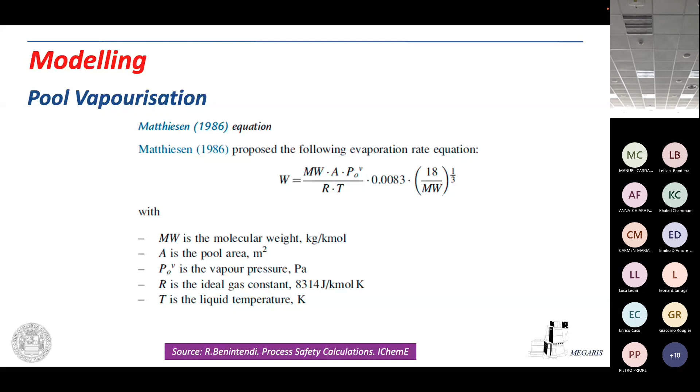It's very easy. Heavy gas - this is an equation, the Britter-McQuaid equation for heavy gas. So you can have a heavy gas that stays on the ground, and so you can have some problems. You think that probably it's swept away by the wind, but in reality it is heavy because of the molecular weight or because of the temperature. You use Britter-McQuaid. Pool evaporation - this is a way to calculate, if I have a pool, the evaporation and the vapor mass flow rate according to an equation like this.

Event tree analysis - okay, what is event tree analysis? In reality, at Flixborough, if they had been more lucky, they could have had also a safe dispersal. If probably there hadn't been an ignition source at the hydrogen plant, they possibly could have had some dispersion with no problem. In reality, we were forced to have a release.

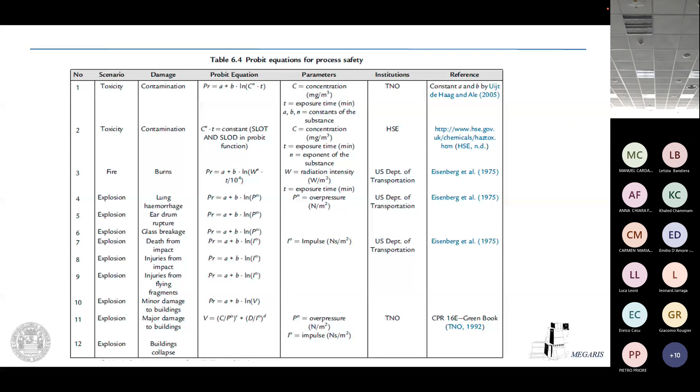We have two constants, A and B, and we have an impact factor that is A. This is the table of probit. Normally, we calculate the probability that is essentially here, then we cross-reference this to this and this, and we find the probability.

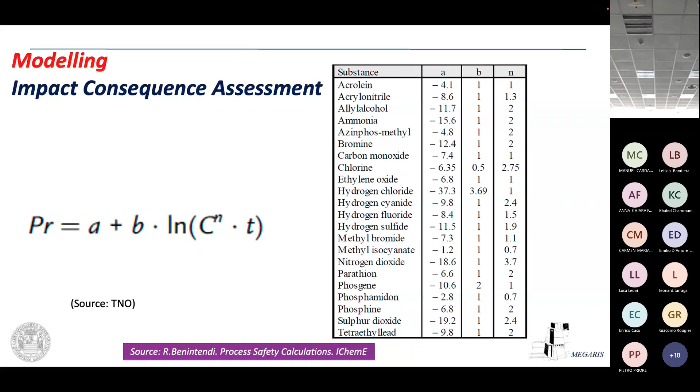For example, this is the probit function for toxicity. You can see here we have A and B, for ammonia, hydrogen sulfide, or hydrogen cyanide. Then we have a concentration C, and an exposure time T. We have a probit function.

There is an example. Hydrogen sulfide is released from the following units at the given frequency A, the first row. Calculate the risk index. So we have a population, the concentration, and the exposure time, 7 minutes. We are exposed for 7 minutes to H2S at a concentration of 1,200 ppm. We calculate, the probit function is 4.5. We assign 4.5 here, and we say 31% of that.

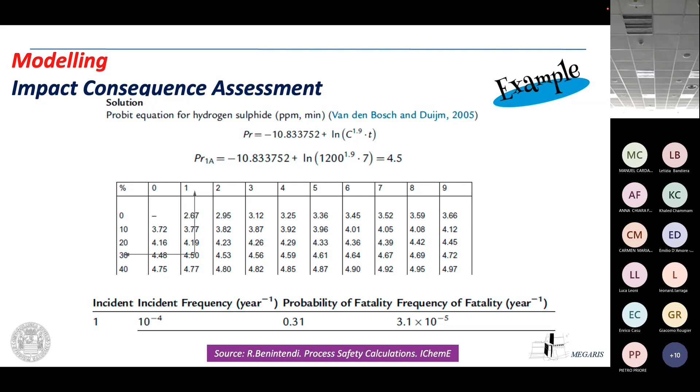This is a legal, important, probably the most accurate way to calculate one of the impact scenarios in reality, which is toxicity, for predicting what happens when you have toxicity in place. And we have essentially other codes, blah, blah, blah.

Fire, I will be very quick. We have essentially jet fire, that is a fire type resulting from combustion of a pressurized release. We can have a pool fire. We have seen pool fire. We have a pool, and the pool is ignited here.

And we can have essentially just flash fire. Flash fire means that you have a flammable cloud with no pressure effect that burns. If you are inside, you die. If you are outside, you are safe, probably. In this case, not necessarily - if you are outside, you can die because of the thermal radiation. Flash fire here is so fast that possibly it lasts, the duration is 1 to 2 seconds. So if you are inside, you die; if you are outside, probably you are safe.

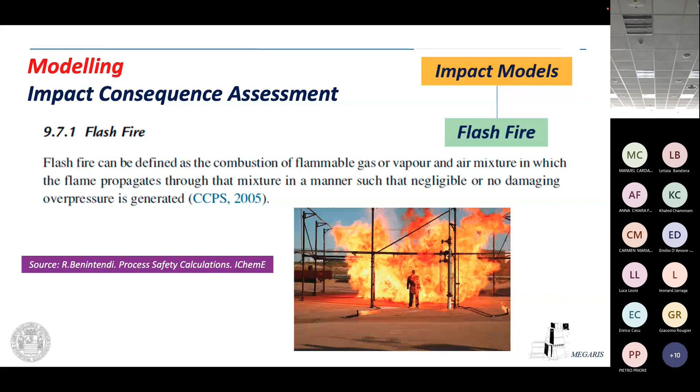If you have time, 10 minutes, we can show some software just to see, if we have time, of course.

What is thermal runaway? Thermal runaway, in my opinion, is not properly covered in the safety studies. Sometimes, I remember in Saudi Arabia, during the hazard and operability studies, I claimed that some specific thermal runaway had not been properly covered, nor by the risk assessment, so it was completely uncovered. It is a temperature and pressure rise in a chemical reactor which can no longer be recovered by the system, and escalates to an out of control situation resulting in loss of containment, fire, possibly explosion, unless the system is able to safely relieve the escalation, thanks to the lessons of Benintendi.

So if the system is not able, the control is not able to recover, you have a thermal runaway. I don't know if you have studied the Semenov theory of explosion. You have two counterparts in terms: an Arrhenius curve, that is the reaction heat producing heat, and a cooling water, for example, a heat exchanger. Point A is a stable point, because if the Arrhenius curve is higher, trying to move up, the cooling water is able to just compensate, and you go back again to A. But if you reach point B, it's a thermal runaway, you cannot recover anymore. This is the Semenov theory of explosion.

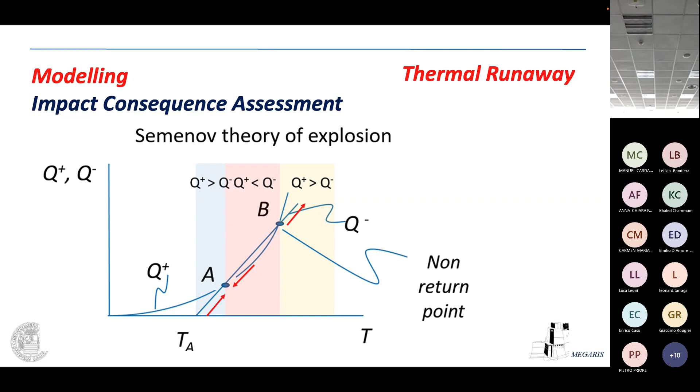Thank you. I don't know if you want just to have 10 minutes, if we have time, otherwise we can stop. It's up to you.

Yes, now it's something much more practical. Nicola, please don't try to escape. Why am I saying this? Because I introduce, and then you connect the laptop, and we can show what will happen when we use it. So sorry, there is a third one for 10 slides, just it's illustrative, and then Nicola can provide you with a specific study, so we can show you what happens in a true study. So the third module? Yes.

This is just an introduction. No, I don't want to bore you anymore.

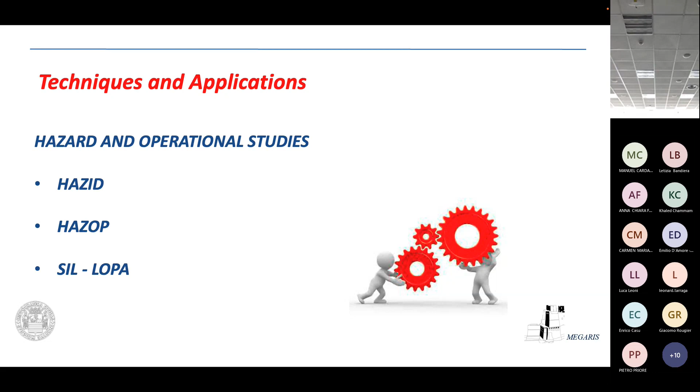Then we have the hazard and operability study. When you go into whatever field you go into after your degree, you will attend some of these studies, so be prepared. What is HAZID? This is essentially a node. These are two reactors, ammonia reactors. A node is a part of the plant separated from the remaining equipment, and normally we use the node distribution because we consider the process temperature and pressure to be the same.

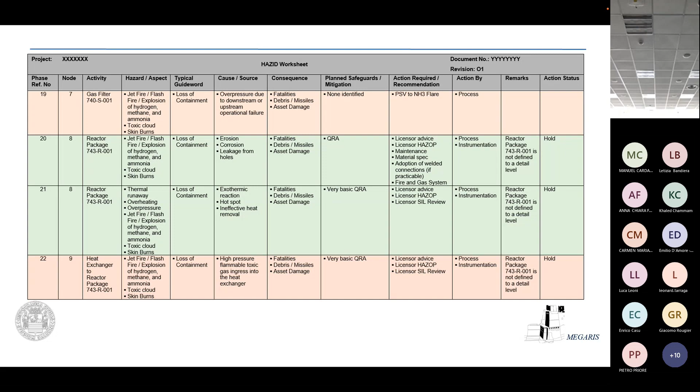So, node number 8. This is a hazard identification. As you can see for node 8, we have jet fire, flash fire, explosion, toxicity - the typical loss of containment guide words. We identify the causes, the consequences, the mitigation, and any additional action to reduce the hazard. Normally this starts at the beginning of the study, in the preconceptual phase of design, in the engineering activity.

The hazard - for example, here we have a separator, 'Nico, separatore.' This is a separator, with fuel gas coming from a fuel gas line, methane. This is a liquid gas separator, node number 1. And this is a HAZOP.

Maybe you've been introduced to this, I don't know - have you talked about HAZOP? No? Anyway, this means hazard and operability study. This is one of the more boring, long, stressful studies, especially when done remotely. 42 days, 8 hours a day, connected with India, UK, Netherlands - you can imagine.

We have some deviation - this is a deviational approach. There is something not exactly complying with the process parameters: no, less, more, misdirected, reverse - flow, temperature, pressure, something departing. This is a brainstorming method, normally carried out by 10, 15, 20 people - every discipline: process, structural, instrumental, maintenance, the manager, all around the table, you can imagine.

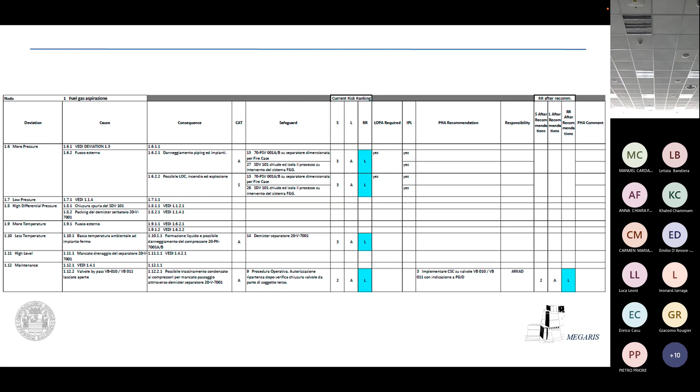I see on your eyes that you are maybe planning to change your study course. It's too late, you cannot become a lawyer now. I don't know, gym, physical training, or becoming a top model, maybe you can. But this is what happens in your future - regardless of your discipline, you may say you don't like it, but sooner or later you will be involved in this. I don't know if you were working on polymers - you know nothing about them, but polymers now come from Thailand, so there's a distribution of the market. This is what happens in every project.

Nicola, it's up to you, please - 10 minutes break or we go? I need some time to prepare. It's another 10 minutes, then you are completely free to change your... Thank you very much.